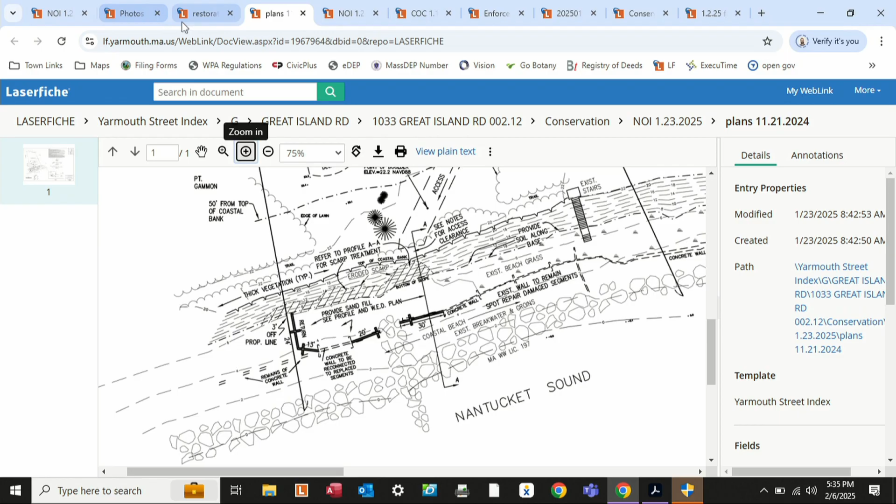I totally understand why you want to repair the wall to reconnect it, and what you said, I can see that working. But I cannot accept putting the return in. It's against our V-zone standards, and I just don't see allowing that to happen. So I would vote no on this particular presentation unless you got rid of the return, just to be upfront.

Secondly, my question is, why sandbags and not fiber rolls to stabilize? Good question. Let me speak to the first point. I'm not argumentative, but we have to discuss these things.

When we think about the regulations with regard to V-zones and structures, I'll speculate you see seawall applications come before you, and if you approve them notwithstanding the 1978 rule, you'd most often be approving something like a seawall in a velocity zone. This is something different, we tried to name it. It's a low crested wall, almost acting as an upper beach groin system. But I don't think we're outside the lines on your regulations if you approve seawalls.

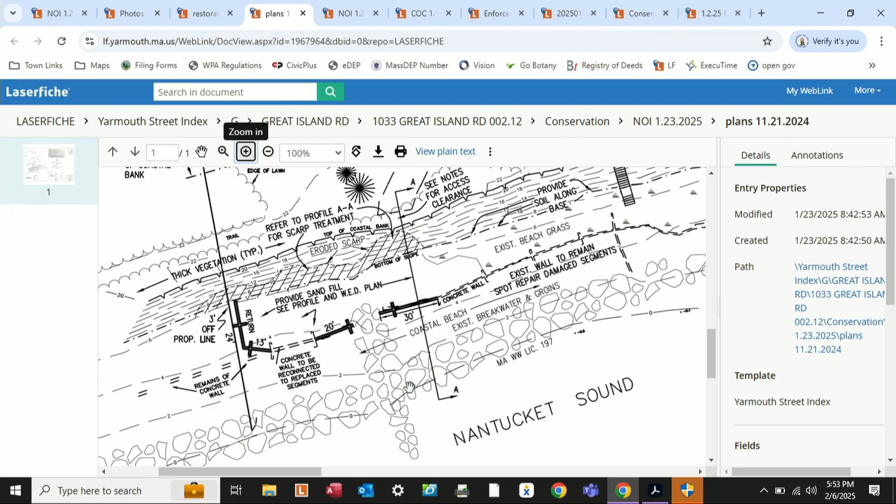Ed, question? So on your plan, in that section where the wall is broken, it says concrete wall to be reconnected to replace segments. But the question was, how high are those replacements going to be?

The same as the ones that are there. And how high is that? That's elevation 5.2 plus or minus. They're not quite perfect, but that's about 2 to 2.5 feet above the grade where they are now.

Okay, and then you have the return. Ask another question. The beach comes up and the return just kind of dives into it.

When you consider the returns as one part of this project, on a scale of 1 to 10, how important are they? Very, because when water gets up onto that tier, it wants to run back.

And if it can run to the west and continue to the west, it will scour just as it's doing now. So in a storm, water is going to get way over those things. This is just a normal, calm summer day at high tide and some water's going in, so they could possibly be too protective against any kind of disturbance or storm.

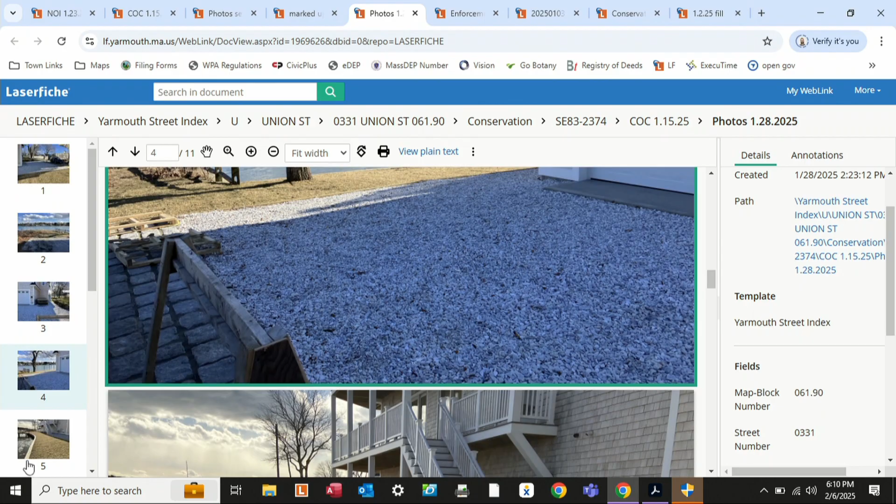As of now, the bushes are gone, the tree's still there, it's grown, and Union Street is - well, let me go to, do we have the plan? Yeah, the wooden fence is still there, the tree is still there. The tree doesn't show on that one unfortunately, but the tree is roughly on the property line, or thereabouts. So to go back to - well, that gives me an idea of where the current property conditions and line is. Yeah, the property line is right about here.

Did they use that for parking on their grass? Yeah, yeah, that's in the photo from Van, and as Dan has stated, there was a previous issue with boats being stored in that area, and you can look at aerials from the past and see boats and trailers and that sort of thing being parked in that area.

Is that still used today for parking? I can't speak to that 'cause there were no town cars. You could probably park there for a minute, but generally parking wouldn't be allowed there. Although I guess the town manager would have to opine on it, but normally people wouldn't - you could just walk down there and throw a line out if you wanted to fish.

Yeah, I mean, we're now talking about town property, and so we don't really have the right to speak for the town in terms of how they want to manage the property. I would assume that they would want to do something to maintain their use. I tend to agree that there's got to be something there - it's a right of way, so you've got to have something there for people to drive across, walk across, that sort of thing. But I think it was also done clearly without a permit, and I don't think with too much thought there.

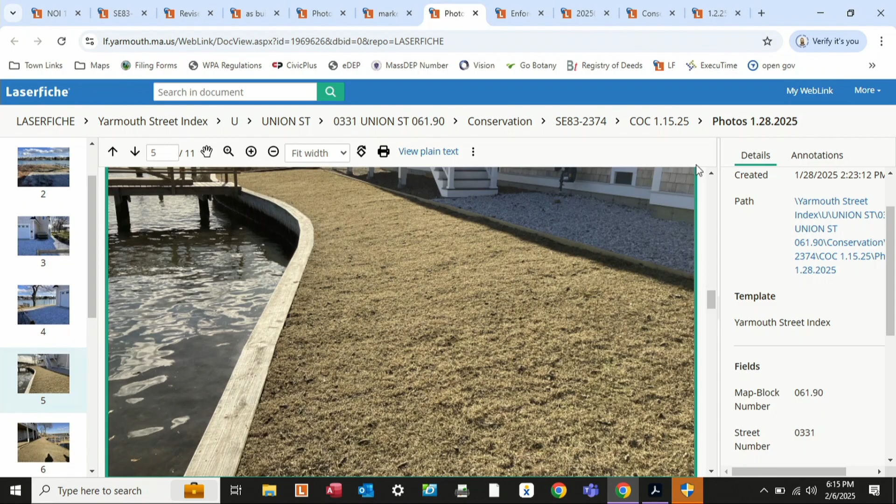Yeah, but at least it was put out there. That's why I would say I'd be willing to leave it, but you'd have to put that 2-foot strip in right now. There's no way I'm going to say come back in 10 years, because I won't be here, I may not be on the commission in 10 years. Can you believe that?

Just so you know, looking at this, it's about 1.5 feet wider than the old walkway was. So where Brittany shows that walkway aligning, full disclosure, it's about 1.5 feet seaward of where it was.

But the area inside of that walkway was certainly lawn before, and is now required to be drip edge, so it's only very slightly wider. Just to be clear, the incursion we're talking about is about the size of that little triangle I've drawn, until you get to what's in the road. If you really want us to scrape up what's in the road and put it back to the kind of crummy condition it was, we could do that, but it doesn't seem like it would make much sense, because it was always just kind of dirty, hard-packed, gravelly grass that somebody had to mow.

I think we'd have to hear from, is it DPW who maintains natural resources? Yeah, DPW or natural resources. In fact, there's a study going on now partially funded by the CPC regarding all these town ways to water. I don't know if this thing is identified or not.

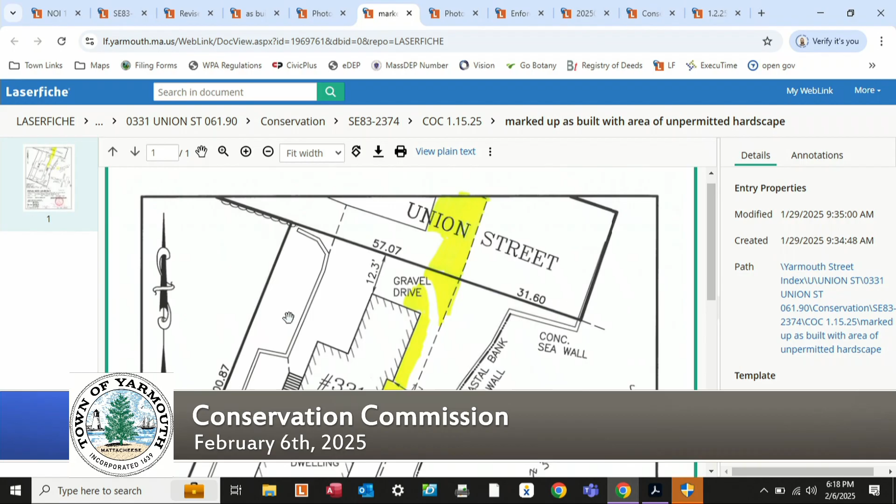From that side, I'd like to get some feedback from DNR on that one. Then as far as the part of the property with the extra gravel fill, I understand it does serve as a drip trench, but usually those are like a foot, 18 inches wide, so it's much wider than that. As far as we're looking at it, it's wider than it needs to be.

And if you disagree with our back-of-the-envelope calculations, if you could figure out the actual square footage of excess gravel, we'd like to see maybe a 3-to-1 restoration, mitigation, planting.

I agree, the best place to put it is along the river, along the water's edge. I understand what you're saying about having to redo it in 5 to 10 years, but I hate to see it left as lawn in the intervening years. If you'd said 1 year, we could do something different, but 5 to 10 years is a long time.

It wouldn't be the end of the world to redo it, but that was just my thought, it might be a little nicer on the corner, but I hear you.

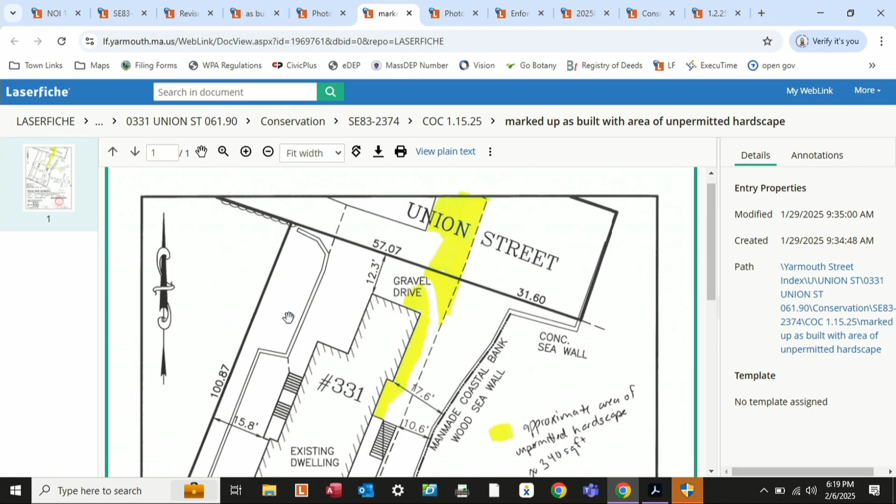All right, well, I'll go to the owner, we'll check with DNR. If they don't want it there, we'll put it back to exactly what it was and remove the extra hardscape, and then we can just issue the order. Or if you'd like to mitigate it with 3-to-1, we'll do that. It's obviously not a big deal to lift up some gravel, so one way or the other, we'll get it figured out.

I appreciate your time. Do we need to continue to a date certain, or would we just reapply? I guess you could either withdraw it, or we could deny it, and then you would just have to reapply, I think. Say no more, I think it'd be much easier.

We'll withdraw, if we could withdraw without prejudice, and then we'll get this figured out. If you could help point me in the right direction on who to talk to about the right-of-way, whether it's DPW or DNR, whoever looks at that. Maybe they've got some drainage plan in that area.

It would be wonderful, but I'll check in with them. Talk to Bill Benetti at DNR. And then if you would, tomorrow, could you send an email to Joe and Brittany, just saying we request to withdraw this COC request? Absolutely, and then we'll take it all up and start the whole process over again, once we get that figured out.

As soon as we get it figured out, we'll see which way to go. But a 3-to-1 mitigation or remove it sounds like the way to go. So we'll get one of those two items figured out, and off we'll go. All right, I appreciate your time. Thank you, Dan.

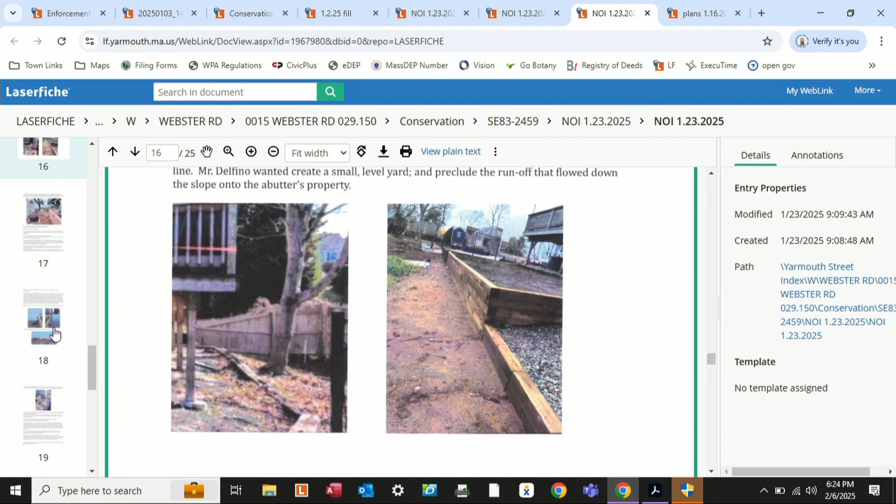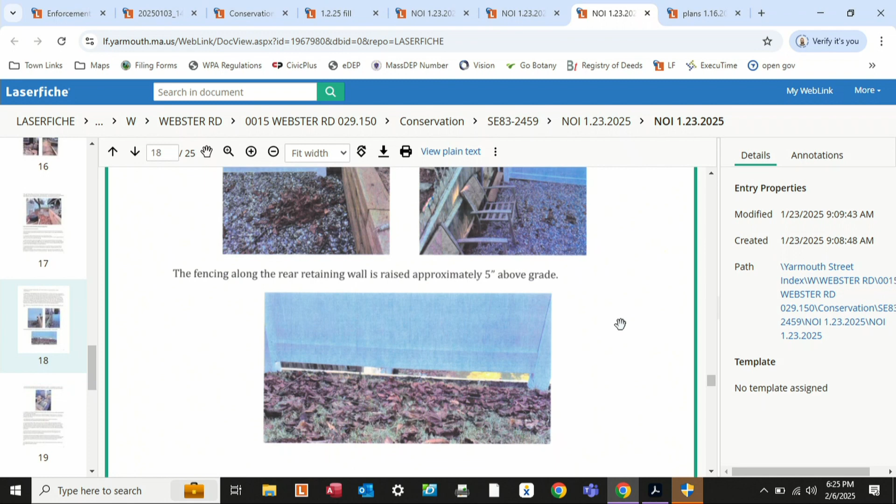No other questions? Are there any abutters here? My only concern, I guess it's not really for us to worry about, but I don't like that you've got a wall going off the property onto a neighbor's property. I think the neighbor on the east side? Oh, you're right. He's very friendly with that neighbor, and the neighbor was happy that he replaced the wall. I assume it's helping with the stormwater, that's probably why. He replaced it in the exact same location as the pre-existing one, and the neighbor was happy that somebody came and fixed all the rotten walls.

Is there anybody online? Anybody in the commission? We're concerned about how the stormwater is being managed. Are those dry wells? There are plenty of gutters, and there's a lot of stone - he brought in a lot of stone, so it can just flow, it's sandy. There's no issue with runoff.

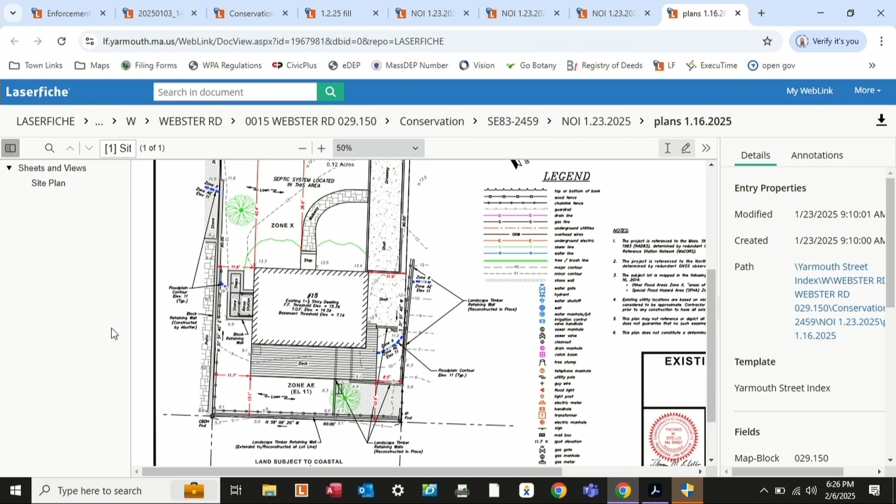Anybody in the audience on this one? Anybody on Zoom? I can't read that name - Claudia? It just says Claudia on the iPad. All right, Claudia, go ahead.

This is Tim Norton and Claudia here, and we're the abutters at number 13. We had concerns that their addition encroached upon our wall, which we had installed - we went through this process last year. There were drainage holes on the side of our wall that abuts them, and those are now covered up with this fill. I want to let you know that was a boundary wall. I understand our neighbor needs space for his short-term rental business, but he filled the space that we left for the draining property. That is all, thank you, everyone.

Okay, thank you. Do you want me to address that, or does it not need addressing?

Would you like to address it? Their wall is constructed actually on my client's property, and if any drainage was occurring, it shouldn't have been discharged onto my client's property anyway. So they didn't. I'm confused by the numbers.

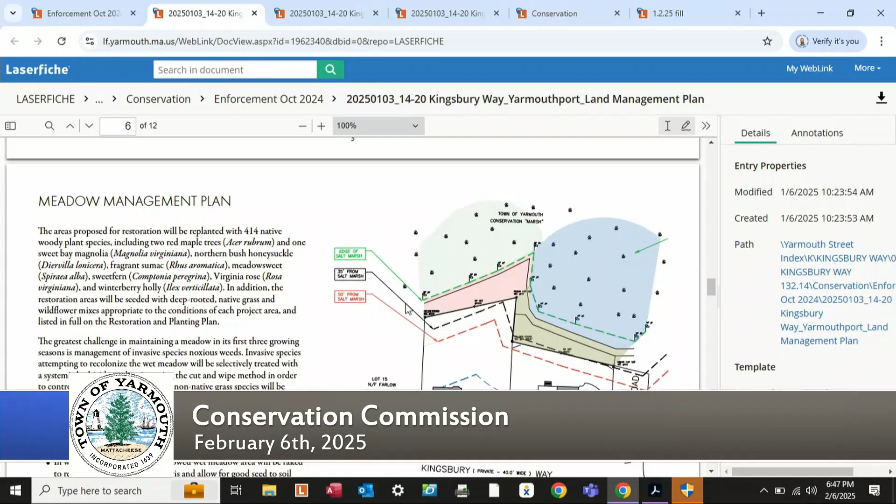Well, I guess I'll start off here. I mean, I have a couple questions too, if you need a second. No, I think I've got it, but I will certainly come back to you in just a minute.

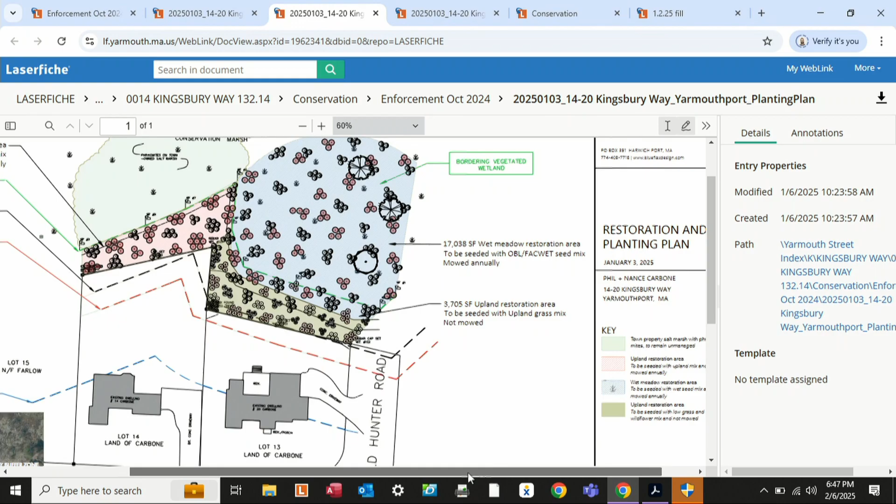So, this restoration plan is not real clear. First of all, I see no contours, or at least nothing that's called out or specified. So I'm a little concerned with that because I'm looking at the site and I'm looking at the photos and I see where this, especially where the grass is coming down, you've got that grassed bank you keep referring to.

Is that not a coastal bank? It is not a coastal bank as far as I'm understanding. They did have the site surveyed by Land Management Systems. We delineated the bordering vegetated wetland there. So if anything, it potentially could be an inland bank, perhaps.

Looking at the flood elevation, I am not aware. The flood elevation was not what was required in the enforcement order. What was required was that the 35-foot buffer, 50-foot buffer, and 100-foot buffer be shown, and that's what the land surveyors picked up. I am showing that slope per my measurement.

If you notice, in the area that's tan, there are two lines there. I went out and measured the top of the slope and the bottom of the slope. The bordering vegetated wetland is north of the toe of that slope. So the actual BVW that was delineated based on soils, and we did submit the data sheets for that, is the green line that we flagged in the field.

So you can see that it runs through the area that's shaded in blue. And then as you move landward or south of that area, the tan area, then where the tan area starts and the blue area meets is the bottom of the slope, just based on my field measurements. And then there's a second line that denotes the top of the slope, and then the land levels out from there.

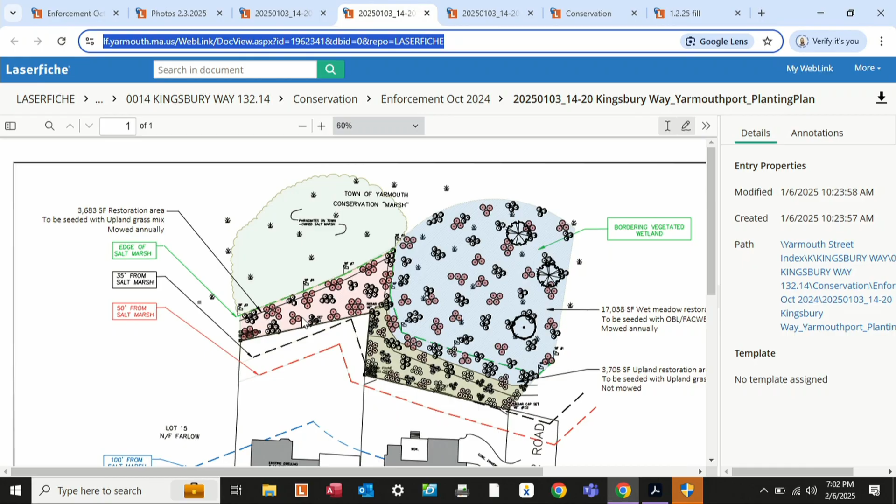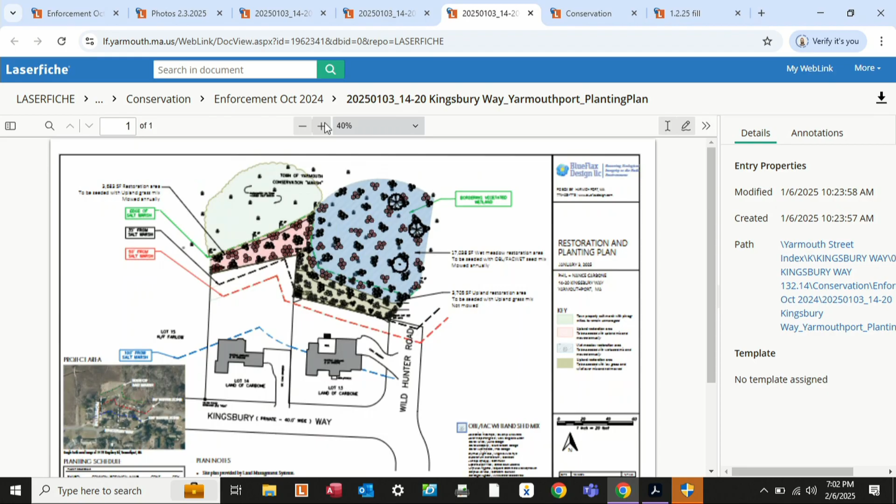Okay, because really my main issue, and I think Brittany kind of agrees with me here, is that the reason we wanted to see the topo is because it does appear like this could have been a bank. And the only reason it doesn't look like a more natural wetland delineation is because it's being mowed for so long. And when you look at the delineation, which I know you had done professionally, in what reality does a wetland come to a peak like that and then branch out?

Like that seems unrealistic. Well, the slope is there, so that's at the toe of the slope on the Phragmites side on lot 14, and that is the way it is. I'm presuming, and I don't know the history of this area, you probably all know it better than I do, I don't know if at some point this was a cranberry bog, being managed as cranberries, that's what it looks like to me. This could have been back in 1899 to 1907 when the cranberry industry was booming here. But that is what it appears. There's a ditch system throughout here. So that's how it appears to me, I would say that is a man-made feature, man-made topography, not natural topography.

Again, because of its status as BVW, I don't know if this would be considered an inland bank as far as the slope, although yes, the BVW we delineated with lack of vegetation. This was done completely on soils, and those soil logs and data sheets were submitted.

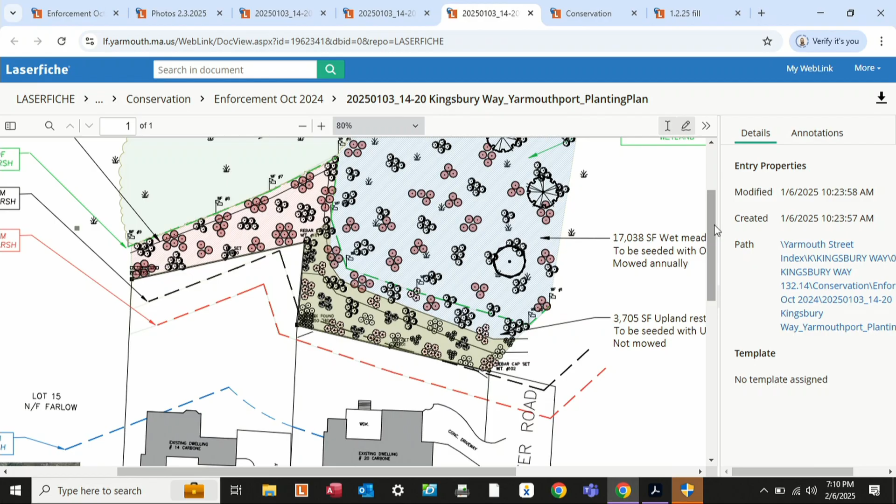So those were the two specific pieces we were looking to speak to you about. So my question then is, where in that enforcement order does it say anything about doing any further invasive control or management? It does not. And so why would we - that's what I'm saying, because we're considering long-term management that's going to better protect the resource area, and that's what we're proposing.

I think this is where we have to draw the line. I don't want to see you doing any more work on town property at this point. I want you to restore it like what the enforcement order says, and then don't touch it. If you want to mow your lawn, mow your lawn. If something grows into your yard, mow it. That's fine. But I don't understand why we are moving on to telling a private citizen to come onto town property and do continued invasive management.

My only answer to that is because they had an order of conditions with the support of the Conservation Commission in 2017 that encouraged them to do that at their expense. And they did. Unfortunately, they've continued to mow beyond the order of conditions, but they originally engaged - this whole project started with support of the Conservation Commission to do invasive species management. So now they're only continuing to maintain what they've done.